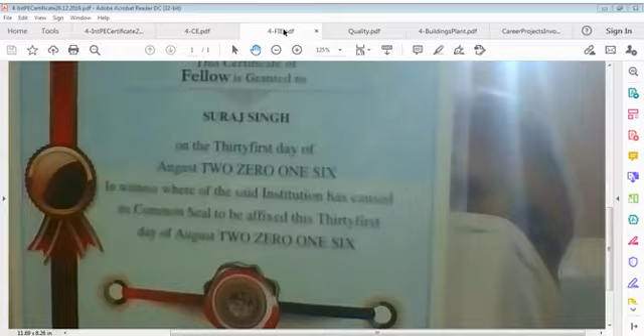So this is certification, this is fellow membership of the Institution of Engineers, according to provisions of the Royal Charter 1935, in which year the Institution of Engineers India, established in 1920, was granted Royal Charter by the then King of our country, King George V. This certificate is for that purpose, a statutory certificate, you can say.

And there is a Chartered Engineer certificate. Chartered Engineer means a corporate member of the Institution of Engineers India can be awarded this certificate of Chartered Engineer India, meaning an official engineer, you can say, Chartered Engineer India. And I am attached to the Civil Engineering Division because by qualification, academics, and experience, I am a civil engineer.

And this is my certificate of International Professional Engineer India. This though expired on 30 September 2020, but it is under process. I applied for that. I don't know the result, but let us see. So I close this fellowship file, and I close the Chartered Engineer file as well.

And now let us go to the quality file, which is most important here. Quality means, what I mean by quality, it's proprietary of none, and of course propriety of everyone. Quality plus, then I say designs, then I say construction plus, and I say method statements, and then it is risks, costs, etc.

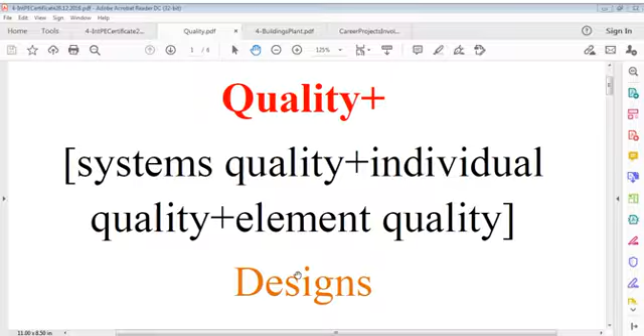Systems quality - if there is no quality in the system, you cannot expect individuals to perform with quality. There may be exceptional cases where individuals try to perform, but that is on a personal basis, not as part of the system. If everybody related to whatever system tries to perform qualitatively, I think the scenario can change. But if some person does it, those who are not interested in that level of performance try to ignore that person or start teasing the person who is efficient in quality performance, sincere in every act of work, who wants to do something per system requirement.

And then I say element quality. Element here means everything - product, services, or whatever you are doing, I consider as element. That element which is the result or output of your work, is it having quality? That is a question mark. I am saying 'having' now, present, because it was having in the past, I can't say. Shall it have in future? I can't say. But what's the status now? If we can't have quality at this moment, this means in the past we did not have that. So our culture has gone down to a level where quality is subject to your desire, not to product or element requirement.

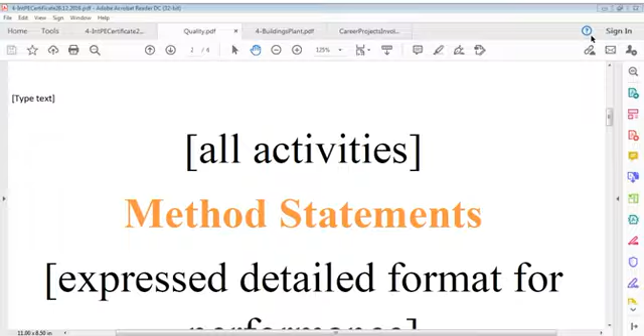All activities mean there should be something based on my design mind, based on my quality mind or your quality mind, you have to decide sequences in which way you have to go, with what time allotment, and with what time achievement of quality, achievement of standards. That kind of formation, that kind of sequence of thoughts, that kind of expression and writing, that kind of chatting with others, or even if no writing, no chatting, but some contemplation exists - we can call that a kind of written or unwritten method statement.

That's what I'm talking of - an expressed detailed format for performance, which says I have to consider the time factor, which can't be changed. Time is limited for everything. Yes, there can be variables, but it's unchangeable.

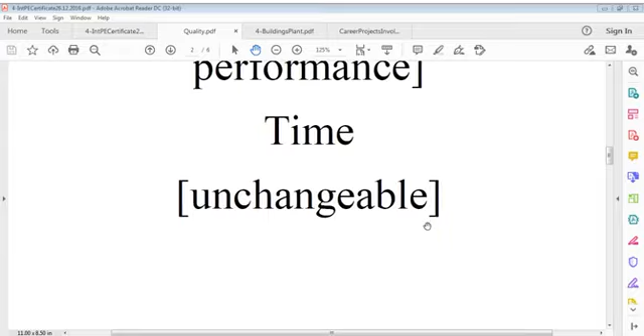Then we say, okay, cost is a very important factor, because I want to save cost. So this is a better way, or I want to do it another way, which I can justify for quality purpose, cost purpose. So you can say cost is invariable, but escalation can be considered minus or plus.

Cost is there. Then if you say risks - now, the world of risk is unknown. It may be unknown, it may be known, but generally when it results in jeopardy of work or jeopardy of health, you know jeopardy means to bring some danger to someone unknowingly, to let someone be exposed to danger which was never expected, or expected both.

If it was expected, that risk can be diminished, that risk can be controlled, because we know there's possibly a 95% chance that this will happen. So we can say I understand that, I can foresee it, I really understand how it shall work. But when something is really unknown, I don't know what the result will be, because either I haven't experienced that one, or I can't calculate that as part of foreseeing.

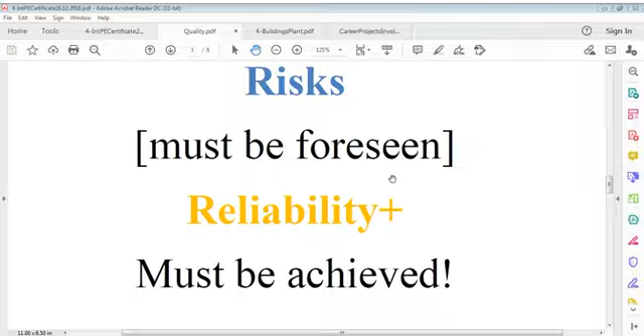Both are considered risk - what is jeopardizing risk, and what is preventive risk. Both are there. Even jeopardy can be prevented, so it must be foreseen. Reliability is a very big factor.

Reliability - what does reliability mean? We have to achieve that, because it is profession, it is life, it is business, it is commerce, it is industry, it is what we are selling. I am selling something, and my buyer, my consumer, my user should feel happy.

That user should think, whatever is expected, whatever payment has been made, that return has come, achievement has come. Its reliability, plus value-added reliability, must be achieved, and if it's not achieved, then I am a failure. So how can I define reliability in terms of activities, in terms of what should happen or what should not happen?

Reliability itself says we have to depend on you again and again. Liability, though liability is a different word, because liability means complete accountability, complete financial responsibility, quality responsibility, every responsibility - that is liable. You are liable to punishment, you are liable to discharge, you are liable to this payment and that, we say.

So what is reliability? In simple terms, we can say whatever service, whatever product we are selling, whatever service we are providing, that should be safe. Safety - it should be given a safety element, that it's not going to harm you, it's going to give a better life if not better, at least it's not going to harm you.

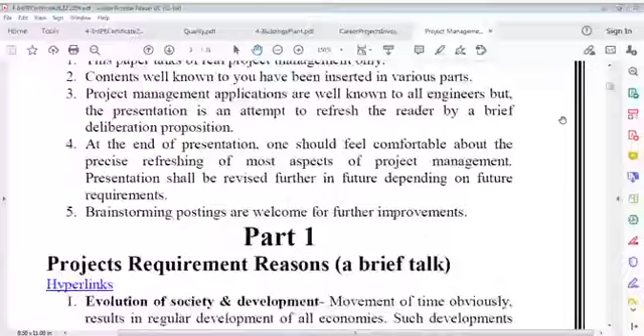There are so many factors which are defined, 8 factors I talked about yesterday. Starting from scope, and then cost, and all that was there which we talked about yesterday. It's better to show you and let you read yourself, because if I speak it myself I may change the sequence. So it's here: scope, quality, time, cost, risks, human resources, procurement, communication plans, etc. That's what I was talking about.

So all the other knowledge areas, factors, then analysis, you can say it's life actually. Analysis is a very high profile term, and people do not understand this, even those who are bound to understand it, bound to conduct it, they too do not. Analysis cannot be done by everybody.

So the simple answer is this: it's a very powerful tool in a sense, an invisible tool. It's a tool in the mind. If you can do analysis, I think you are a brilliant one, a person who's mentally very active, not a sleeping guy who just wants to eat and live. This can't apply to them.

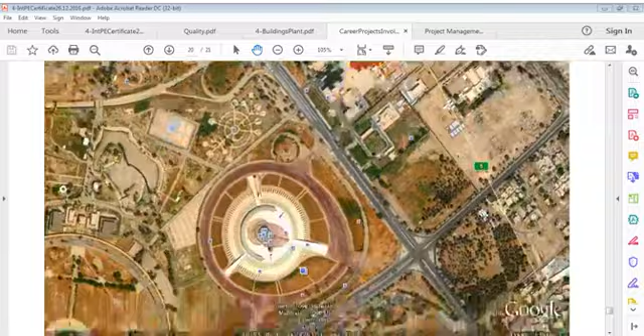Here it is, the press conference. It was called Qasr Mutamarat at the time, meaning palace conference, palace. It was called that in those days when Iraq and Iran were in conflict. That building was there with a tower, and you can see the beauty and quality of the work, the quality of layout it's giving. There's a beautiful building here, not a little construction, but very beautiful. You could not even remove your eyes from it, it was so beautiful, it was in view.

And the same building I'm talking of, which I worked in, this one here, we worked for that building, and I had a great experience there. So that's what I can say about it, I tried to show you how it works, how it goes, how it behaves.

That's what it was, I'll close this file now because it's gone. I can't keep all files open, it consumes memory and the video can be disturbed if too much memory is taken. That's the point where I had to stop the video. I'll close it now, if I require I'll open it again, the purpose of this is over, so I close this file. Why these people are disturbing, I don't know, what is that, I don't know. I will be disturbing for nothing.

So I come back to the same point which I was talking about, organization, management, and that's what it's about here. I can say scope, quality, time, cost, risks, human resources, procurement, communication plans, which we discussed, and we had to go on.

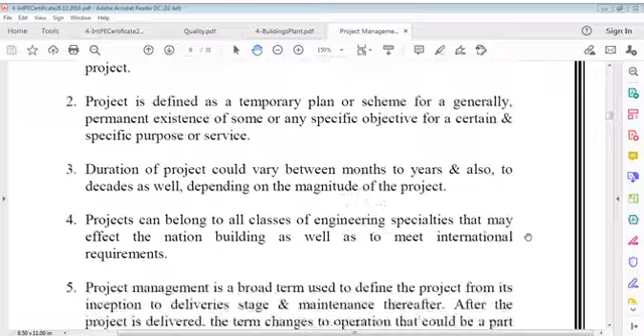I think we reached somewhere, I don't exactly remember, yes we covered this also, we had covered this point in our last talk. We talked about the charter and quality standards to be achieved on deliveries. So let us again have a review of the charter to refresh what we studied: scope, charter, decision making stages about the project, and authorization of the charter. That was the point we had in our mind, in our consideration.

We call it front end engineering design, means FEED. Description of deliverables, contract requirements, contract sufficiency, specifications, duration, charter, risks involved, stakeholders, shareholders, sponsor, financier, contractor, clients, consumers, organization, partners, subcontractors, possible investments, possible returns, possible reputation enhancement, prestigious or ordinary project, other projects in hand, capacity of organizations, expansion of organization, maybe project discarded currently, project manager and all other depending on type of considerable project, resources allocation, charter authorization, etc.

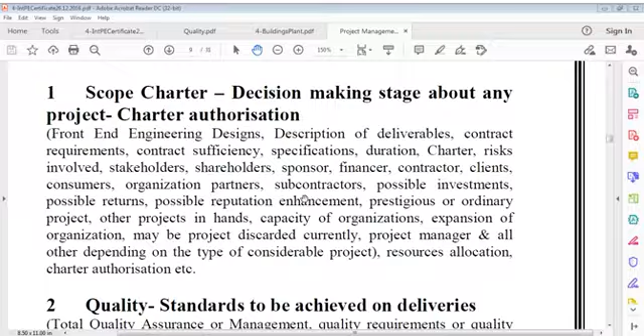All these points and maybe many more such points can be included in description charter for reference in future, when we investigate where did we make mistake, or why did we select this work to do, or this bid to offer. Depends in future, means were we ready for this or we were not ready for this project, or we blindly took decision.

Or we feared someone against our organization. All these points we have to consider in coming time due to whatever problem, change of board, change of something, or even then we have to investigate our progress of business, why we are not achieving what we expected. All those points are considered in that.

This becomes a foundation to know how our loads coming are not accepted by this foundation, are not transferred accordingly. And that's the purpose of charter, means everything should be in writing and this should be approved by company organization. Means why did we select something, why did we do something, that must be clearly in black and white, and blue, and it must be in writing.

There should be a combined responsibility for that. You can say total responsibility for that. That's not an individual one who is responsible, because you have to respond to all stakeholders. And in fact, stakeholder representatives are also responsible for that equally.

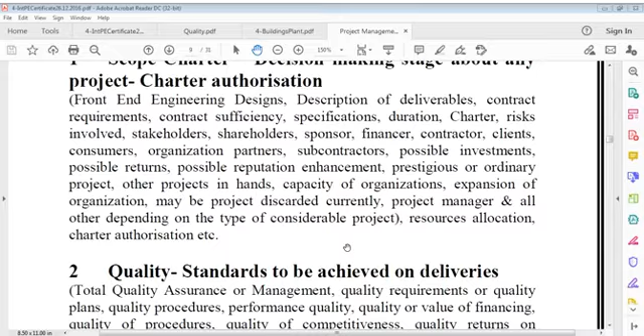It may be prestigious projects, ordinary projects, or shall we say worldwide level project. All this we have to understand. Who shall be liable for this? Who shall be leader for this project? All this point we have to keep in our mind while establishing charter. That's all. Then we go to quality.

Now quality standards to be achieved on deliveries. We talked of this quality at length, on this page of quality, which page we will repeat every day, because every day mind thinks something.

You have to think problems. There are hundreds of problems in life, and every problem has different analysis, has different backing, which we have to understand. That backing is very important part of life. We cannot simply move without backing. So quality standards we achieve on deliveries, that is sole point.

And we call, when we say quality, it's simply not quality of some one point, it's total quality system, that's what we call it. And quality requirement is already known, it's defined within certain tolerance, within certain limits.

Nothing can be achieved unlimited, and this limit also keeps on varying. No fixed limit. If we can say we can expand this limit, we can expand if we want. That's up to us, because it's a question of relevance to time, it relates to cost.

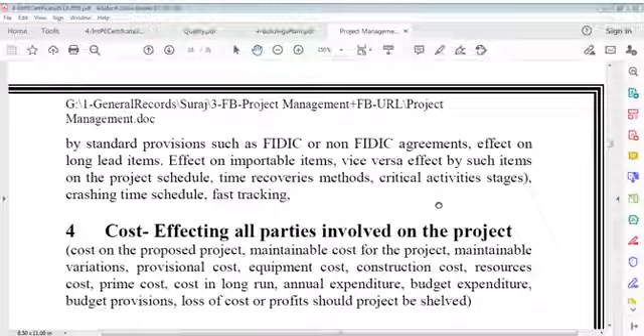The most significant and valuable factor that may govern acceptance of a project is time, which may not be allowed in excess of agreed time, keeping in view competition as well as the additional cost that extra time may require. Time is not allowed to vary, but time is allowed to squeeze for valid reasons. Time schedule acceptability, effect of time schedule by force majeure, effect of contracts and standard provisions such as FIDIC or non-FIDIC agreements, effect on long lead items, effect on importable items, and vice versa.

Effect by such items on project schedule, time recoveries, methods, critical activities, stages, crashing time, schedule, fast tracking - these are so many descriptions given here. I'm talking of time which is a quantum - not hours, not minutes, not seconds, but a value. When we say time of project, just like cost of project, destiny of projects, or contents of projects, I can say time is the same.

No, 'project time' is not a wrong term - every project has a time. We must understand that you start something and cannot keep unlimited construction of that, saying 'okay, no problem, we start, every day we do it, let's see how long it takes.' You can't say that performance is professional. You have to define time based on quantity - time tells you what your speed should be. If time is limited, it means you want to expedite the project on a priority basis, because time is limited, and that limited time is called the duration of the project.

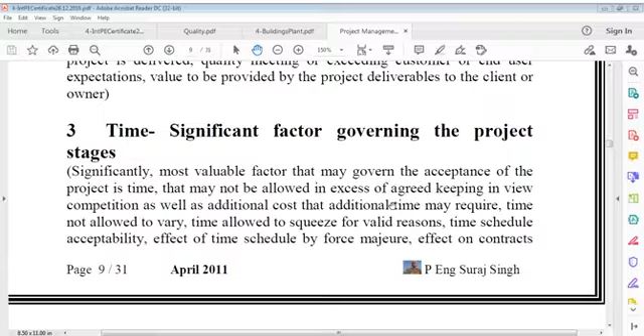It is there, not only with you, it's elsewhere also, so you can't vary it. Time is allowed to squeeze for valid reasons - time schedule acceptability, effect of time schedule by force majeure, effect on contracts, and by standard provisions such as contract documents like FIDIC or non-FIDIC agreements, effect on long lead items, effect on importable items and vice versa, effect by such items on project schedule, time recoveries, methods, critical activities, etc.

So we can say tracking, crashing time, tracking - there's so much involved with time that you need contemplative thinking on how to recover and value it. So time recovery method - if you lose it, you have to recover it. Critical activities, stages, crashing time schedule, fast track. So you have to work hard at times if you lose time.

It's very easy to lose time, but recovering it is like imaginary work - you think it will work, but no, it won't. Lost is lost, you cannot bring it back, because it doesn't come back once it goes away. So time must be preserved, time must be used properly. You should know what I have to work on the next day and what people worked on the last day.

That's what time requires. So time is a very important factor on a project, and its knowledge area - if you know everything about a project, you may say, well, we have to be next in this. That's okay. Then we want to go to cost. Cost.

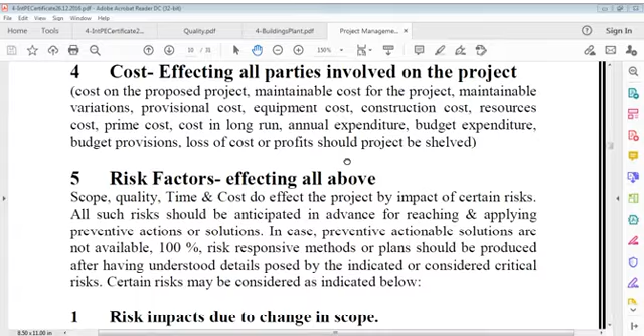How does cost affect all parties involved on a project? It's a very important point to consider, because ultimately cost is what you work for. Whatever work we do, it's for cost. That's what a contract is. If cost is not defined in the contract, consideration is not defined. Cost is consideration, meaning these works I have to do as a contractor, and I have to get this cost or consideration from you, my employer. You employed me for something, you have to pay for that work. That's the contract sum, and I have to deliver what is given in scope. That's the job, and that's cost, which affects all parties involved in the project. Do we understand that?

Which part is going to be affected? It affects all parties. All parties can consider cost on the proposed project: maintainable cost for project, maintainable variations, provisional cost, equipment cost, construction cost, resources cost, prime cost, cost in the long run, annual expenditure, budget expenditure, budget provisions, loss of cost or profits should the project be shelved.

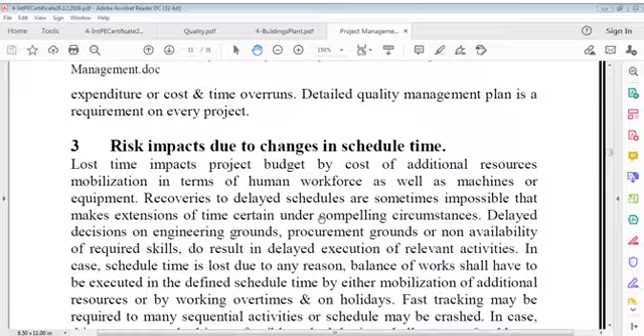This risk can lead me to the availability of opportunity. This risk can help me, can direct me. That is a very important point. Risk impacts occur due to various reasons we have to confer with: risk impacts due to change in quality standards, risk impacts due to changes in scheduled time, risk impacts due to changes in cost, and risk impacts due to partly unknown scope.

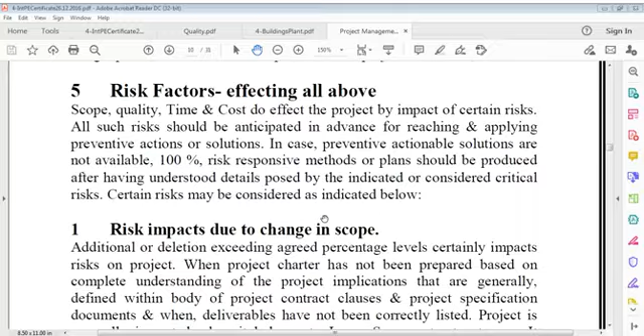And then we have to talk of risk management plans. So these few points we have to understand first, and that is about risk factors. These are just a few factors, it doesn't mean these are final. These are simply, you can say, an assimilation of experience. You can say this risk factor works - I can say risk impacts are due to change in scope.

This is beyond everybody's control, because ultimately change in scope is the authority of the owner or employer. If scope is changed, change doesn't mean only additional, it means both additional or deletive - you can say omission or addition, both cover both items. Whatever you can add to the contract or whatever you can omit from the contract, both are involved. Both are risk impacts due to change in scope.

Additional or deletion, addition or deletion exceeding agreed percentage levels. If there is addition, deletion, or omission beyond agreed percentages - they will say 5% to a maximum 10% of available cost - if it goes beyond those levels, certainly it will impact risk. This is a risk and it will impact the project.

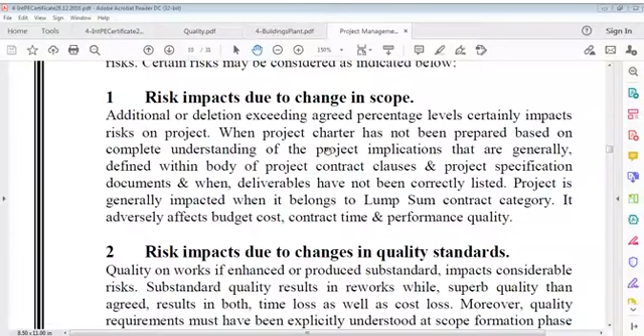So, back again with you on the same point of view of risks. I think we have gone through that successfully. So we discussed risks - changes, change in scope we say, which is very difficult these days. Then we can say quality standards.

Let us say again, this impacts due to change in scope. I repeat this because this is a very important change. Scope omission and deletion beyond certain percentages are not permitted, and in contracts even this can't be permitted. You can say omissions or deletions, additions or omissions exceeding certain percentage levels certainly impacts risks. And that is when the project charter has not been prepared based on complete understanding of project implications, which are generally defined within the body of project contract clauses and project specification documents, and when deliverables have not been correctly listed, the project is generally impacted.

When it belongs to lump sum contract category, it adversely affects budget, cost, contract time and performance. That's where I'm saying in these factors, that is scope, change in scope is very much unbecoming. It becomes unbecoming when we consider that. We cannot say that what we consider is right, not.

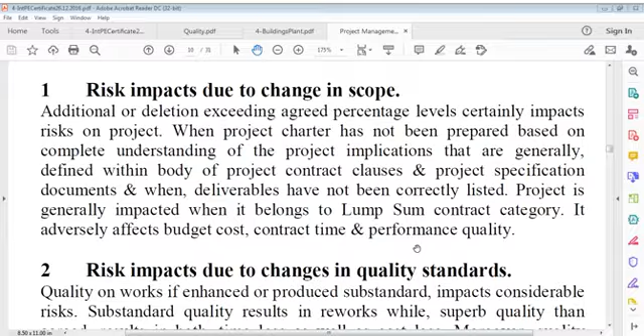So addition or deletion exceeding certain percentages which are defined in contract should not be encouraged, because it shall impact on time and cost, it may be plus or minus cost. Even deletion to certain extent impacts, because your profit is 10% sometimes mainly, and that can impact on that. So we have to see when project charter has not been prepared based on complete understanding of project implications, lump sum fixed price contracts are very critical. Cost changes cannot be accepted beyond certain limit. So impacts must be understood, because it will give impact on budget, cost, contract time and performance quality.

But you can't avoid this also within some limits, because owner has also a right for changes in requirements. You cannot deprive owner of that right, because it's not one day contract, it goes on for years together, and design goes on for months. So a period of say couple of years can bring changes onto scope of work which cannot be avoided. This is a flexibility coefficient, you can say, a flexible requirement. You have to be flexible in that case. So risk impacts due to changes in quality standards we have to take into consideration, which is also a very important factor.

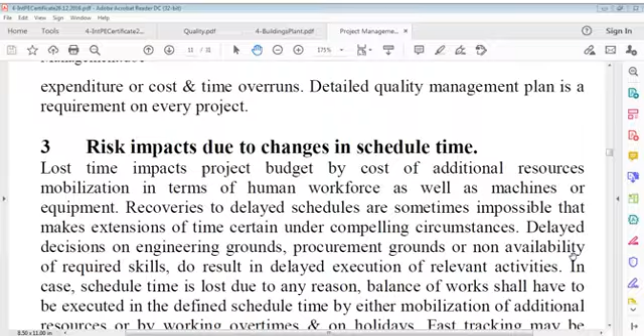Procurement based on substandard quality shall not serve any purpose, but otherwise jeopardize project performance after being rejected, and contribute to requirement of additional time or additional expenditure, or cost and time overruns. A detailed quality management plan, detailed quality performance or implementation and organization plan is a requirement on every project. So what we said in this is a very important point of quality standards. It can't be taken just for reading.

This requires explicit understanding. As I said, quality on works makes an impact. Substandard work gives you losses of time and cost and unacceptability, and if even on follow up you do further work, that will also be considered unacceptable. Substandard means it can't be accepted.

So you know what the loss is? You have spent cost, you have spent time, and on top of that, a non-performance label on your head. That's the important point. If you do it right otherwise, superb, you'll spend time and cost, but you get reputation at that level. But you have to think of that. It can't be always true.

We have to set standards keeping in view restrictions of time and cost everywhere, because whatever we are paid for, we have to deliver only that. We can't deliver beyond our profits. Moreover, quality requirements must be explicitly understood at scope formation and charter time. That must be clearly documented, defined - not in full detail, but indicatively, what we have to do.

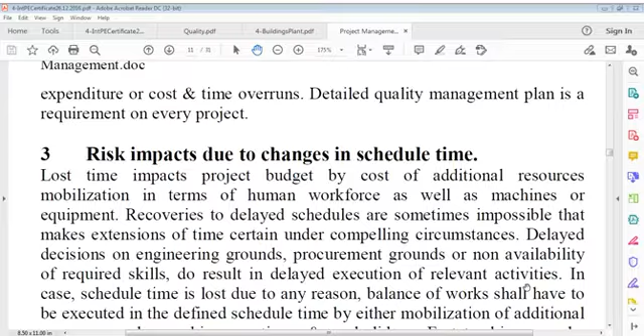Detailed quality management, organization, implementation, and performance plan is a requirement on every project. This was a little explanation I made. I'll jump onto something else now - let us talk about plans. This is also very important from this point of view, and I'll come back to another one.

Sorry, just taking some water. Okay, so I come back to this point of plans. I'd like to discuss something which is also a very, very important chapter.

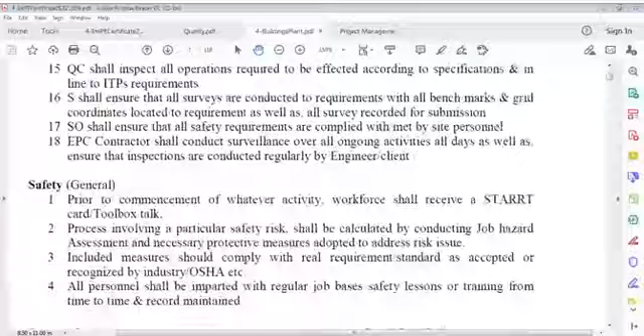I already talked about this method, about RCC walls - it's a very important item. And I also talked about other items. You can browse it and see what methods were involved in that. I'll come on to construction of the main substation.

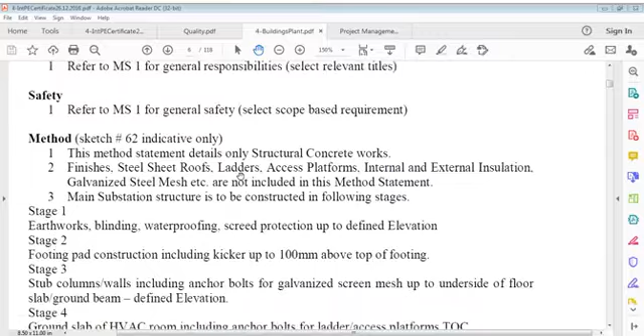This, I think, I discussed, but it's very important. There are 8 points and 7 points we discussed before - stage 1 and stage 2. We can do it again if required, no problem. Let's go to what's after that.

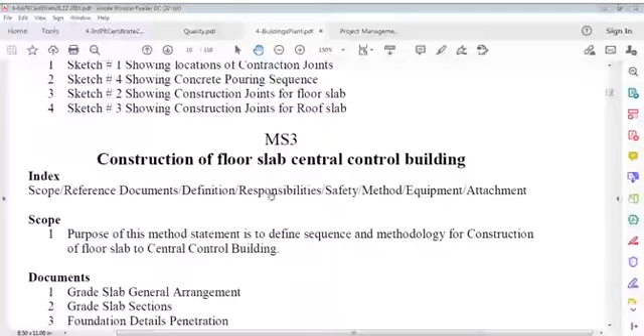After that is construction of floor slab, central control building - that also we discussed. Grade slab. And we have to come to mortar for block work, and mortar for block work cross, and seawater basin baffle walls. I think this baffle walls, seawater basin, is an important one.

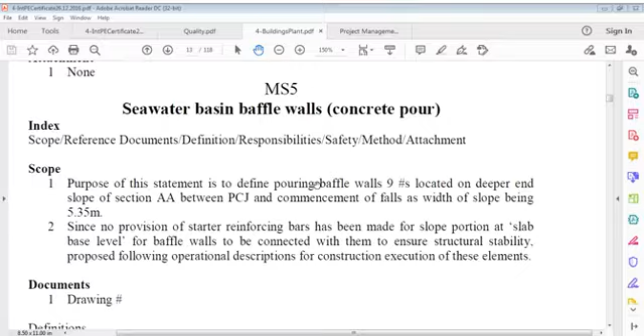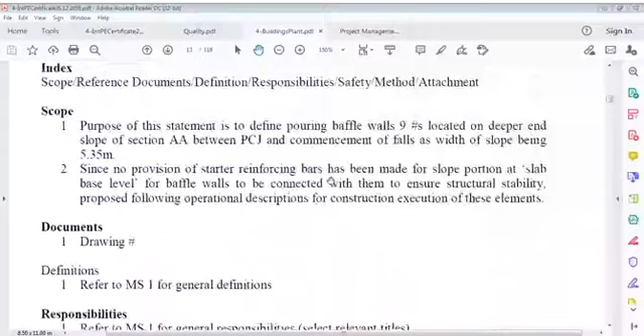This is the same as the plant I showed you in the sketch, the real plant. Then there's seawater basin minor concrete repair - we'll hold on here. That is the seawater basin baffle walls concrete pour, which is a very big pour, approximately 10 meters, maybe more, maybe less - seawater basin baffle walls.

The index is the same, and we are talking of concrete pour here. The purpose of this method statement is to define pouring baffle walls, which number 9, located on the deeper end slope. This is a drawing and section given as an example, between PCJ - the construction joint - and commencement of falls with the 5.35 meter slope.

Since no provision of starter reinforcing bars has been made for the slope portion at slab base level for baffle walls to be connected with them to ensure structural stability, we proposed the following operational descriptions for construction execution of these elements. So it's the scope only.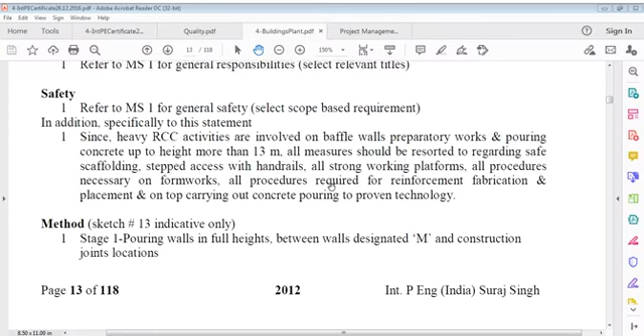Now the drawing is referenced, and for general definition, responsibilities are given. Safety also is given - we know all safety applies, but one point in addition to the described safety is significant: since heavy RCC activities are involved on baffle walls - this is an RCC item and a heavy item.

These heavy RCC activities involved on baffle walls - preparatory works and pouring concrete - go up to a height of more than 13 meters. Pouring concrete up to a height of 13 meters, you can say it's about more than a 3-story building.

All measures should be resorted to regarding safe scaffolding, stepped access with handrails, strong working platforms, all procedures necessary on formworks, all procedures required for reinforcement fabrication and placement, and carrying out concrete pouring to proven technologies.

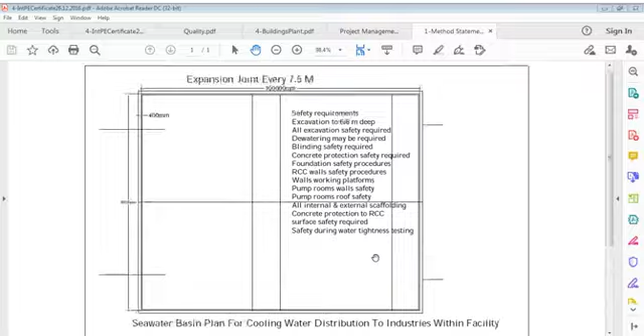It's shown 10 meters here, but okay, no problem, it's 13 meters. The statement says: seawater basin plan for cooling water distribution to industries within facility. Expansion joint every 7.5 meter on base slab RCC structure. Safety requirements: size of this is 100 meters, and here it is 80 meters, a big one, 80 meters by 100 meters, and 400 mm wall thickness, RCC wall thickness.

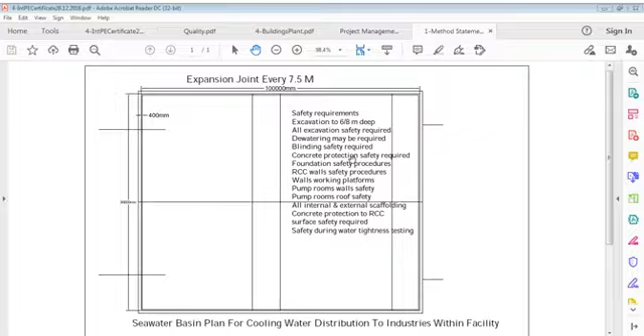Safety requirements: excavation to 6 or 8 meters deep, all excavation safety required, dewatering may be required, blinding safety required, concrete protection safety required, foundation safety procedures, RCC wall safety procedures, walls working platforms, pump room walls safety, pump rooms roof safety, all internal external scaffolding, concrete protection to RCC, surface safety required, safety during water tightness testing.

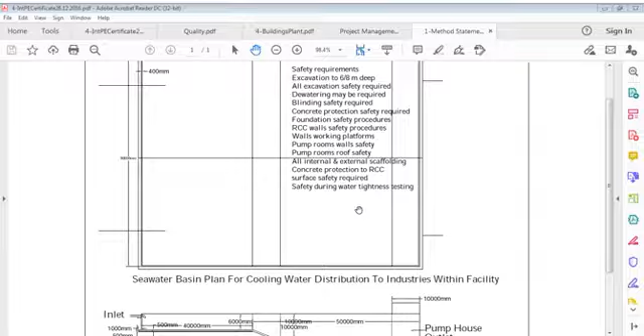So this is just given as expansion joint at 7.5 meter, 100 meter by 80 meter. Seawater basin plan for cooling water distribution in industries, and this portion is 40 meter, this portion is 10 meter, this portion is 50 meter, total is 100, and base slab is 101 meter, I think, 500 here, so we can say pump house outlet is here, this 10 meters. So this is dimension only, so we should not worry about that.

Let us see now what it says. In this case it says it is sketch as indicated. Now there are certain stages in this, and those stages are what you have to understand as well. What stages are there? It says the stages are:

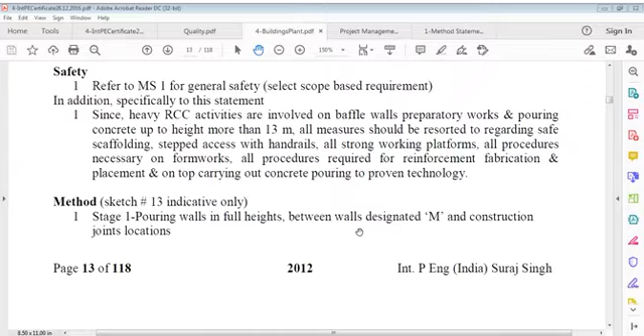Stage 1, pouring walls in full height. Pouring wall in full height between walls designated M and construction joint. So what designation is there? We are just understanding practice, understanding method.

So stage 2, pouring portion of baffle walls, between construction joint and walls, portion of baffle walls between construction joint and walls, and up to a level of 7.14 meter from slab base.

Stage 3, pouring remaining portion of baffle walls from level 7.14. Okay, this is according to the sketch. We will now see how to pour, that's important here.

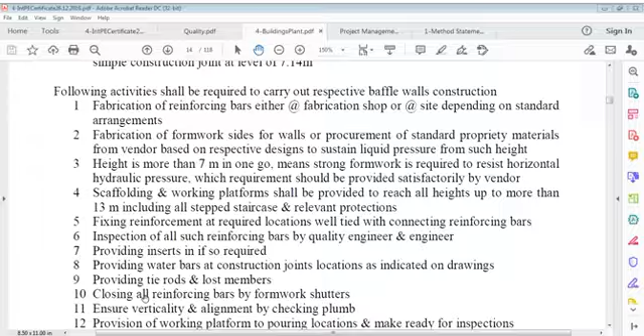Following activities shall be required to carry out. Let me just blow it up a little more. Hold on please, okay, it's okay. So following activities shall be required to be carried out for respective baffle walls construction. Number 1, fabrication of reinforcing bars, either at fabrication shop or at site, depending on standard arrangements and customized work. It's better if you do it on site. I think it's better because it's in your control, and if you do it on site, rather than at a fabrication yard, it means it's better done before you, because you have BBS, you have everything, you can check if they start.

So fabrication of formwork sides for walls, or procurement of standard proprietary materials from vendor based on respective designs to sustain liquid pressure from such height. This is fabrication of formwork, because formwork is too high, 13 meters. Fabrication of formwork at site for walls, or procurement of standard proprietary materials from vendor, based on respective designs to sustain liquid pressure from such height.

That's a very important point. Height is 13 meters, or 10 to 13 meters, so it's around a 3-story building. So pressure, we know what it is, but it's not going to be filled in 1 hour, we have to understand that point. By the time we reach the heights below, concrete would start solidifying a little, so pressure is not direct, yet it must be calculated accordingly, and our thickness of ply, our fixing supports, everything should be accordingly, so that the wall can resist forces imposed on it due to fluid pressure.

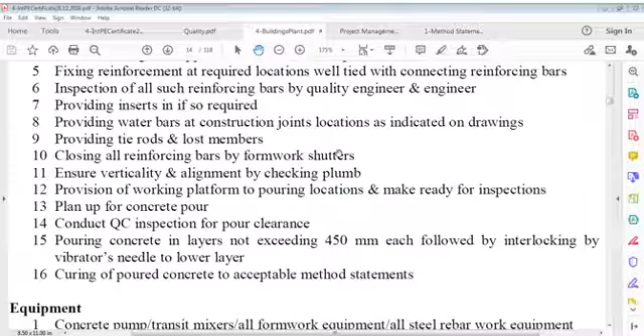Again, we read these activities, which are very important. These are activities that we define for such height of wall to carry out. We call it a baffle wall - actually it is a retaining wall as well, not only a baffle wall. It's written baffle wall, no problem, but it's a retaining wall. It's a water retaining structure, so it's a retaining wall. This is fabrication of reinforcing bars, either at a fabrication shop or at the site, by your way.

Fabrication of formwork sides for walls, or procurement of standard proprietary material from vendors based on respective designs, to sustain liquid pressure from heights of more than 10 meters. For 7 meters, a strong formwork is necessary to resist horizontal hydraulic or fluid pressure, which requirements should be satisfied by the vendor.

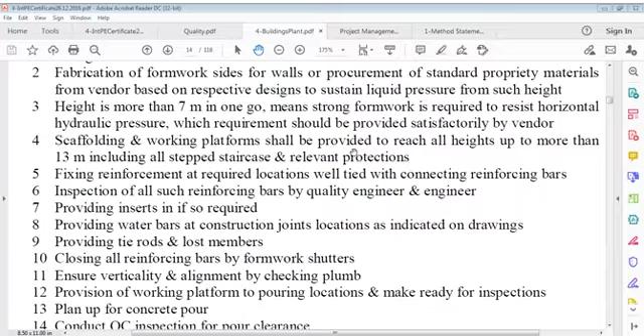Scaffolding and working platforms shall be provided to reach all heights up to more than 13 meters, including all stepped staircases and relevant protections. Then fixing reinforcement at required locations, well tied with connecting reinforcing bars.

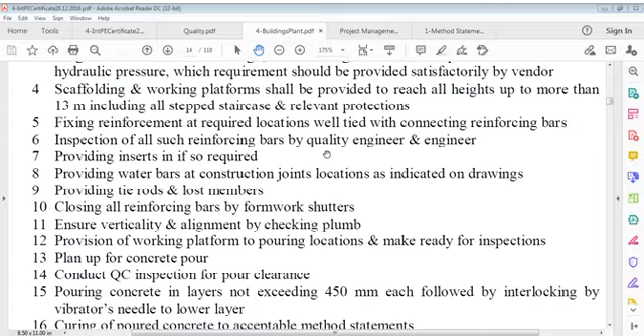Inspection of all such reinforcing bars by quality engineer and engineer. Providing inserts so far as required, and providing water bars at construction joints located as indicated in the drawing.

Because we are going one way, one height, it can only be at the bottom. Providing tie rods and lost members of PVC, and closing all reinforcing bars by formwork shutters, ensuring vertical alignment and verticality all the way. Frequent verticality checks at about 2 meters in height, and alignment should be done before that.

A whole wall, and provision of working platform to reach all pouring locations and make ready for inspections, planning for concrete pour, conducting quality inspections, and pouring concrete in layers not exceeding 450 mm each, interlocked to the bottom one and to the previous layer, and curing of poured concrete as per acceptable method statements.

Now what equipment do we think are there? Concrete pumps are required, transit mixers are required, all forms of equipment are required, cranes are required, maybe a tower crane is required to lift all these materials on site, and steel rebar work, all things required.

But it's a heavy one because it's 10 meters high. So if you think it's 50 meters, we are doing this wall in just 7.5 meters, and then you can say it's 7.5 meters by 0.4, that's about 7 meters, so we take 7 into 0.4 equals 2.8, and 2.8 into 10 meters. So a 28 cubic meter wall is not easy.

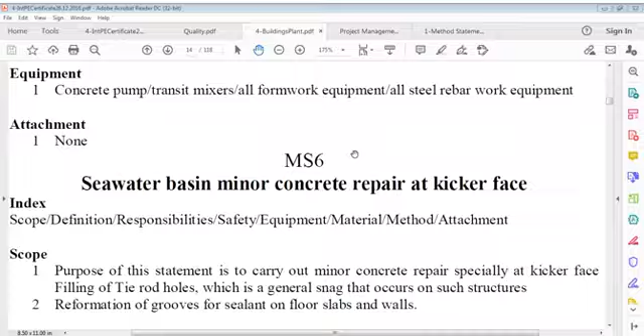What to do? Say, seawater basin, minor concrete repairs at kicker face. That's also very important. Once we repair one, we have to understand what to do with the seawater basin minor concrete repair at the kicker face.

Meanwhile, you can say that this is which one I'm talking about, and I can close it also if it's required, and we'll say... I can close it.

Okay, we'll move to this seawater basin minor kicker repair. Definition, scope, definition, responsibilities, all are the same. Equipment, material, method, attachment, all the same.

You can say the purpose of this statement is to carry out minor concrete repairs, especially at the kicker face.

Do you know what a kicker is? When you have the original slab and you want to start a wall, that wall portion some people call the kicker, a kick vertical member, you can say kick. So the kicker face is where you fix alignment, the kicker is well aligned. So that's your kicking face, and you're going to apply that minor concrete repair.

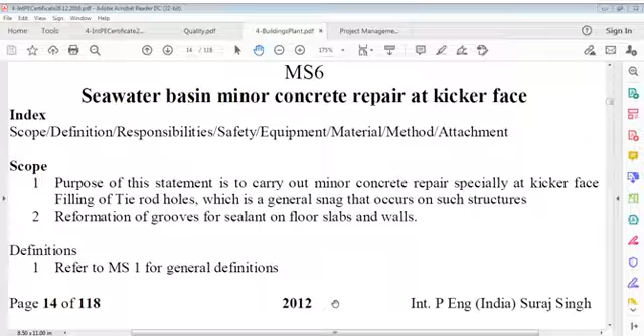Now safety, definition, etc. is there, no problem, so we go further. General responsibilities are already there. Safety means the same thing, means what it says.

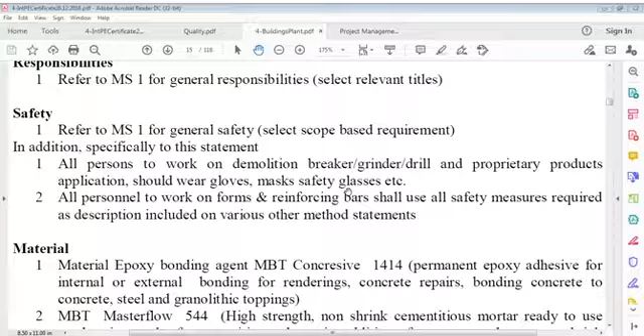All persons who work on demolition, breaker, grinder, drill, and proprietary product application should wear gloves, masks, safety glasses, etc. And all personnel working on forms and reinforcing bars shall use all safety measures required, as described and included in various other method statements.

Material, what material is actually important here? In those days it's old, I think this was done around 2000, 2001, so it's about 20 years back I'm talking. It's not today's, I'm not talking about today. I'm just giving the procedure that was adopted long back.

Material: epoxy bonding agent, let us say. Forget MBT or some brand name, I'm not interested in that, it's just written there as a sample. Epoxy bonding agent, that's a permanent epoxy adhesive for internal or external bonding, for renderings, concrete repairs, bonding concrete to concrete, steel, and granolithic toppings.

You can say: high strength, non-shrink cementitious mortar, ready to use product in powder form, requiring only on-site addition of water to produce a non-shrink mortar of predictable performance, formulated for use at plastic consistency, for bedding, repairing, grouting and void filling such as concrete repairs, void filling between old and new concrete, and filling tie bar holes.

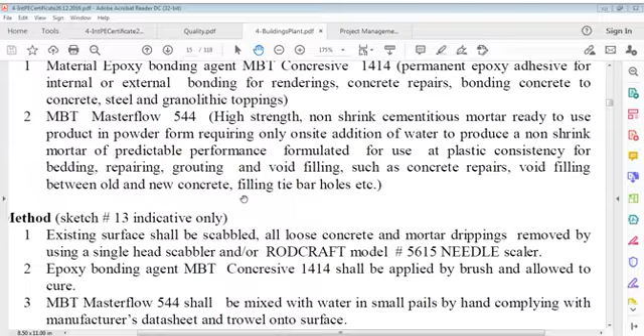Then we go to void filling between old and new concrete and filling tie bars. Now the method: sketch 13 indicating only, same sketch as opened last time, so it was 13 only, no problem.

Existing surface shall be scabbled, meaning all loose concrete and mortar drippings are removed by using a single headed scabbler, a Rodcraft model 5615 needle scaler. Epoxy bonding agent is needed, so first we need a scabbling machine, then we use epoxy bonding.

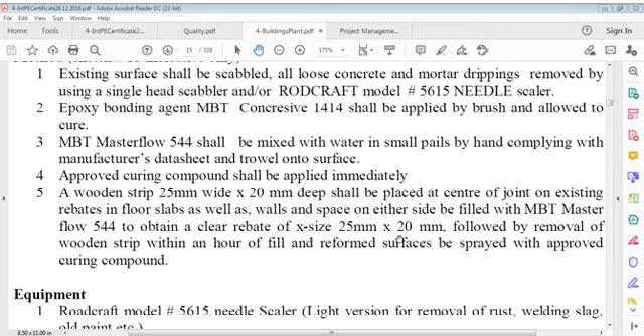This is a little complicated one: a wooden strip of size 25 by 20 mm deep shall be placed at center of joint on existing rebate in floor slab as well as walls, and space on either side be filled with MBT Masterflow to obtain a clear rebate, followed by removal of the wooden strip within an hour of fill, and reformed surface sprayed with approved curing compound. So what is the equipment? We have the model, needle scaler, light version, per manufacturer's catalog.

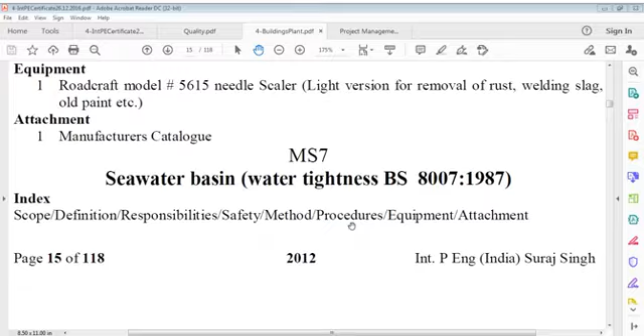Then we go to the seawater basin. Water tightness is a very important item. Water tightness test according to BS 8007 1987. Scope are same: scope, definition, responsibilities. This is index: scope, definition, responsibilities, safety method, procedures, equipment attachment, etc. It goes the same.

This is to transport seawater to the seawater basin and testing major volume basins. The purpose of this statement is to define complete procedures for transporting seawater to the seawater basin and testing major volume basins.

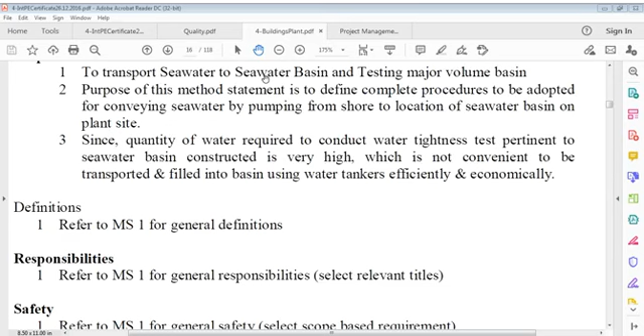Then definitions are there, responsibilities are there, safety is also there. Now what we additionally need in this case is the traffic directory signs for ramp breakers.

Now, a protection arrangement - let us say traffic directory signs for ramp breakers. Traffic directory signs for ramp breakers at 3 road crossings shall be installed. There are such obstructions in this case which we have to cross, so we have to provide traffic directory signs for ramp breakers on the exposed pipe route.

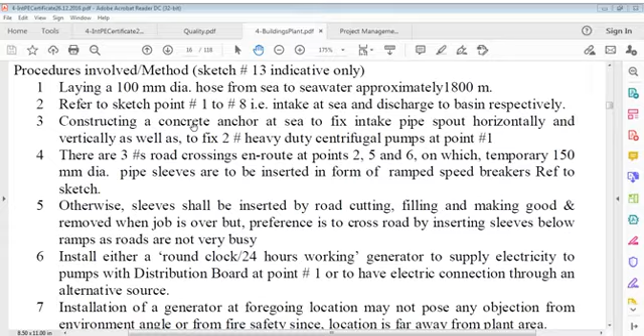There are 3 road crossings en route at points 2, 5 and 6, on which temporary 150 mm dia pipe sleeves are to be inserted in form of ramped speed breakers. Otherwise, sleeves shall be inserted by road cutting, filling and making good, and removed when the job is over. But preference is to cross the road by inserting sleeves.

Otherwise, sleeves shall be inserted by road cutting. Then install either a round-the-clock 24 hour working generator to supply electricity to the pumps with a distribution board.

So we can say install either a round-the-clock person there, install a generator full time at the foregoing location, which may not pose any objection from the environment angle or from fire safety since the location is far away from the plant area. Install a timber clamping platform on the ditch at point number 4.

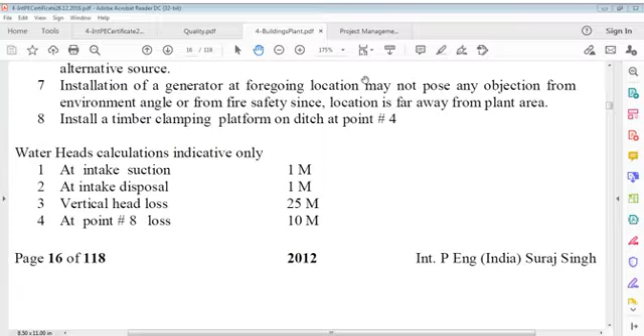Now we have to do some calculations in this, as water head calculations indicative only. And this is what is there - you can just keep that in mind. This is the calculation; I just remove and use this important item taking into consideration.

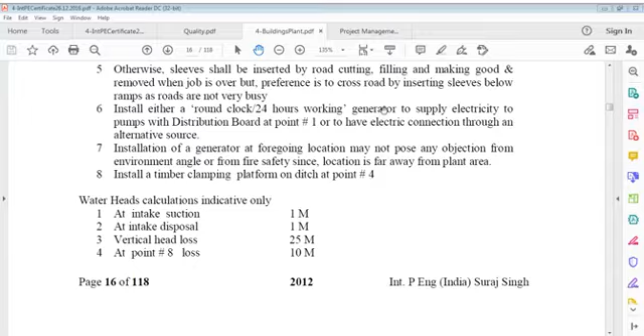You can say intake suction, intake disposal, vertical head loss at this point and this, and also here. Just a minute please - we can just think of this and we'll talk together.

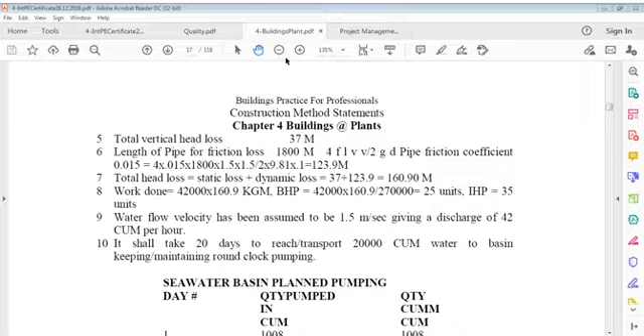I think you must have taken into consideration all this, probably, which is a good one. So I can say that is here.

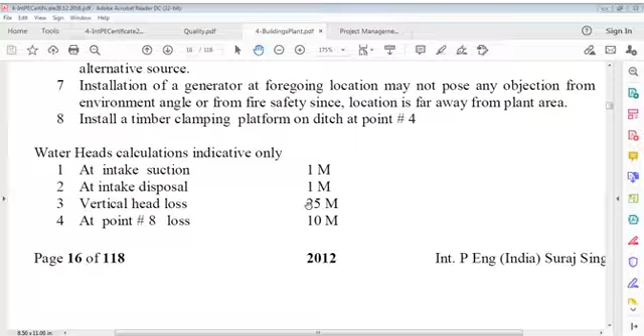Intake suction is 1 meter, intake disposal is 1 meter, vertical head loss is 25 meter. This is between the level from this point to the disposal point, approximately 25 meters, and there are losses of 10 meters. So we can say total vertical head loss is 37 meters - 27 here and 10 here, 27 plus 10 equals 37 meters.

There's head loss during this journey of pipe transportation. Length of pipe for friction loss is 1800 meters, that is 4 FLV square over 2GD.

That's the pipe friction coefficient, being 0.015. So it's 4 times 0.015 into length 1.8 into 1.5 squared, over 2 into 9.81 into 1, that's 123.9 meter - that is length of pipe for friction loss. This is friction loss. Total head loss is static loss plus dynamic loss, 37 plus 123.9, equals 160.9 meter loss.

So work done is equal to how much? That is 42,000 into 160.9 kgm. By this you can say BHP is equal to this quantity divided by 270,000, so 25 units. For this work we need 25 units. IHP is equal to 35 units.

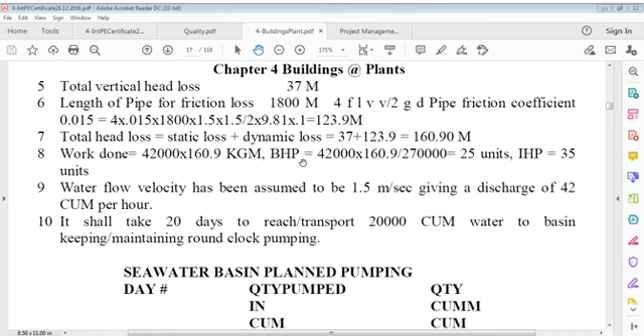Water flow velocity has been assumed to be 1.5 meter per second during this pumping, giving a discharge of 42 cubic meter per hour. It shall take 20 days to transport this quantity.

20,000 cubic meter water to seawater basin, maintaining round clock pumping. Round clock pump means you need a standby pump also. So for seawater basin pumping, we need this machine of pump, which could be standard performable pumps, and we have to see how many are needed.

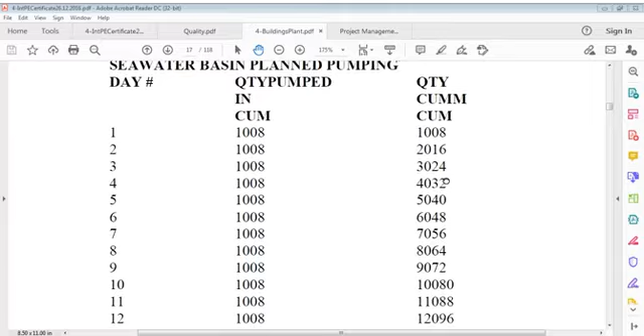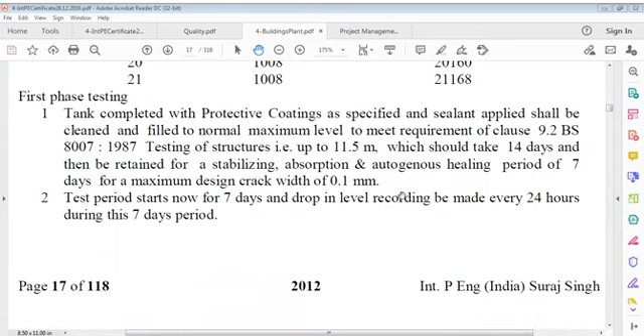See the chart here. Seawater basin planned pumping, if we start day 1 and go to 21 days, on one day the quantity pumped is 1008 cubic meter, and we add this every day, so we get 21,000 something like that. This is the same thing from that Excel sheet, nothing added. First day is this, second day this, third day like this. Every day you add 1008 cubic meter, and 21,000 cubic meters total on that day. So this first phase testing we have to take care of.

I think the tank completed with protective coatings as specified and sealant applied shall be cleaned. Well, I am not agreeing with this type of item, though I was given this by the person responsible to coordinate and make a statement, but I don't agree with this. The tank completed with protective coating, because we have to test RCC. It was mentioned in the specifications and they took benefit of that, and therefore they applied protective coating prior to testing. I don't mind it, but it's not correct.

Tank completed with protective coatings as specified, and sealant applied, shall be cleaned and filled with normal maximum level to meet requirements of the clause. Sealant applied is okay, fine, do it, but shall be cleaned and filled to normal maximum level to meet requirement of clause 9.2 BS 8007 1987.

Testing of structures, that is up to 11.5 meters, which should take 14 days and then be retained for stabilizing, absorption and autogenous healing. Period of 7 days for maximum design crack width of 0.1 mm.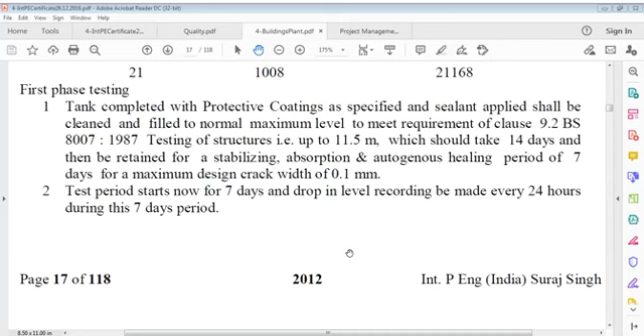It says it would take 14 days and then be retained for stabilizing, absorption and autogenous healing. Period of 7 days for a maximum design crack width of 0.1 mm. This was specified. Test period starts now for 7 days and drop-in level recording be made every 24 hours during this 7 day period. Total permissible drop in level, allowing evaporation etc., should not be more than 1/500 of average water depth of full tank, which limits to 10 mm or another specified or calculated amount.

Now, having the test been successful, backfill shall be carried out. The foregoing explanation provides for application of concrete protection coating prior to water tightness testing, but preferably coating should be applied post successful water tightness testing. On site where this project was carried out, application of coating was made prior to testing. Factually, on projects, the decision depends on all team members, including engineer and consultant.

Second phase testing. Now, I think I should take a break here because already it's nearly 3 hours. We have to review also what has been done today, because this talk on tanks is very important for engineers.

Water tightness testing is a very important activity in quality control. Water testing clauses on such plants apply not just to the seawater basin alone. There were many sump chambers, underground sub chambers, below ground sub chambers, and also many other structures that carried water within them, and so many manholes as well. So we have to keep all these factors into consideration. This activity of water tightness test is a very important activity.

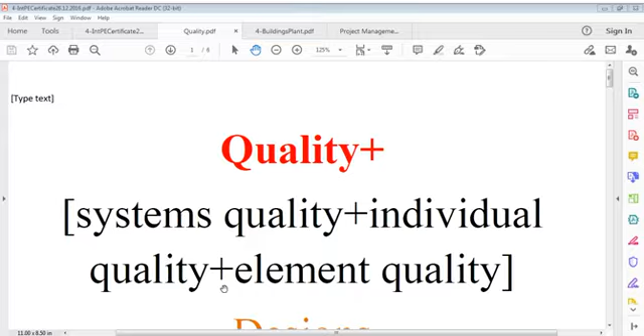So what we actually tried to learn today is something about quality, which I talked a lot about. We discussed various factors and various provisions, and we conferred a little on this.

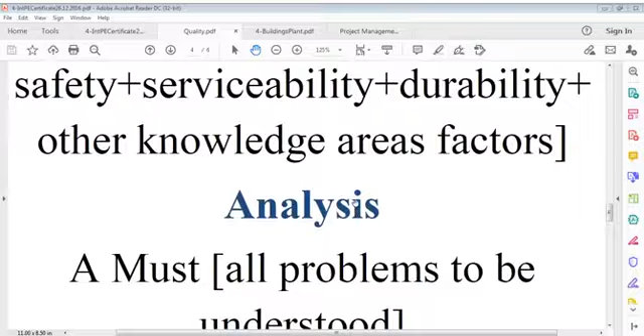This is engineering after all, you can say. This is engineering, and it must be supported by all these factors, without which we cannot move a single millimeter. So one end is quality, other end is engineering.

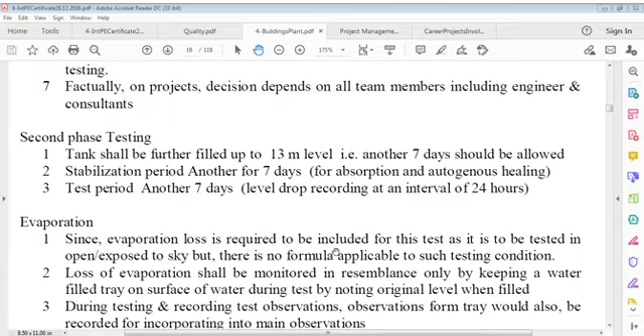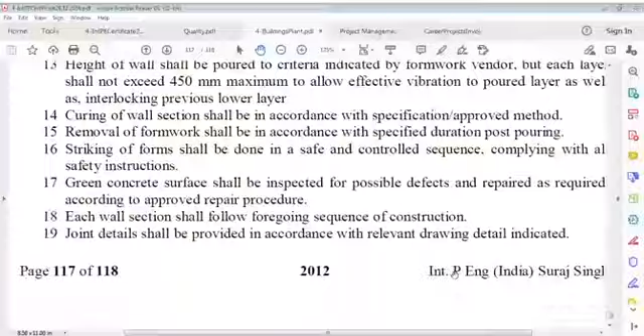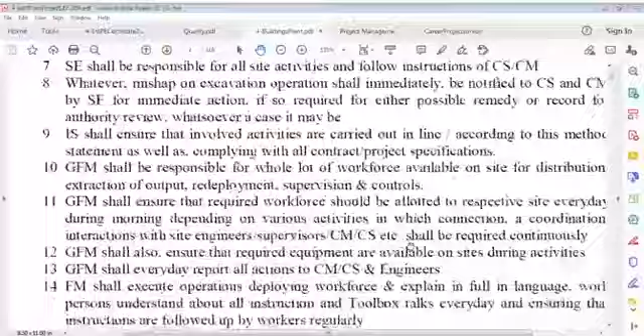Of course, we discussed this, and these plans we discussed with all of this before. So this was about that.

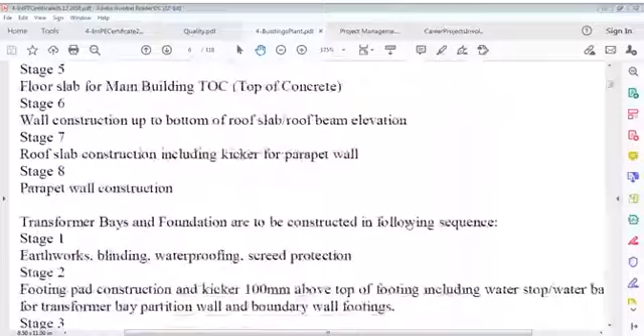Construction of main substation we discussed before. We discussed about these stages before, and now as it comes, you can say that

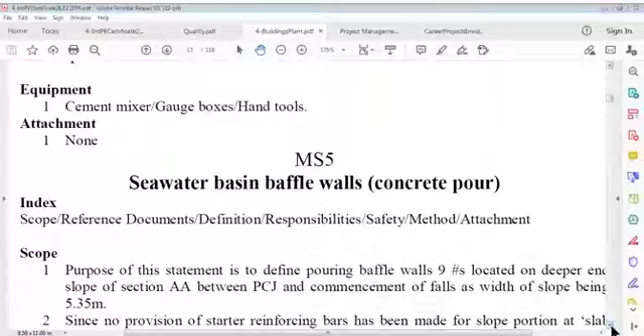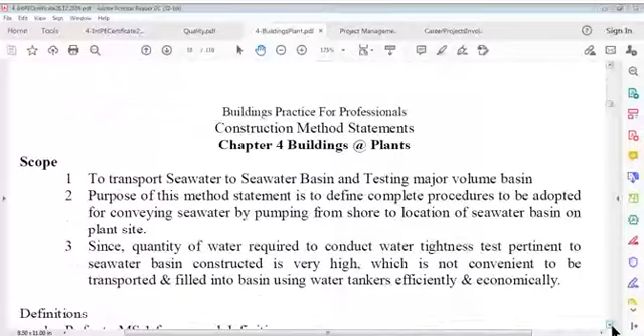baffle walls we discussed, seawater basin, repairs we discussed. And water tightness test we are doing.

That's very important, we'll take care of this later also. It's not easy, so I keep it down. I close this file, project management, building plant. I close this file, and I'd like to give you again the sketch of the seawater basin.

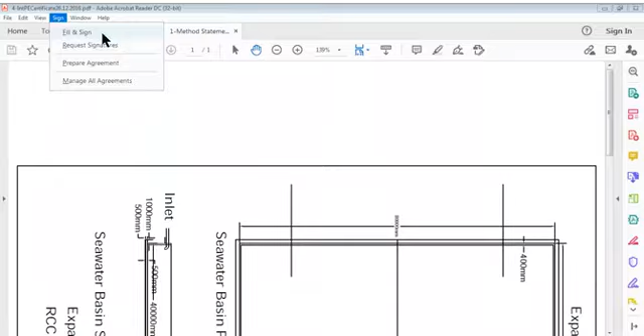And that is the sketch, yeah, this one, which we discussed at length. We discussed this one for the purpose of that, we discussed all this, we are talking about this area in this, and now I can say we close this, and I think we have reached a conclusive point about today's talk, considering various methods in this case.

As I said, for me methods are very important. To an extent, quality can be maintained or cannot be maintained based on that consideration. If we consider we can maintain quality, that's the best consideration we can do. We should not leave it to time, we should not leave it to circumstances, we should do our best efforts to get that.

Being engineers is our responsibility. You cannot say 'no, I cannot do it,' you have to do it. There's no way out, you have to do it. That's the only way we can move forward. We cannot keep things for granted, nothing can be taken for granted.

That's what I say, it's not every time so easy, we have to understand that. It's not simply certification that we have to do, we have to care for everything, and that's the point. I think you guys, engineers and other public members, get my point of view that life is not as easy as we think. Life is different and everything is different.